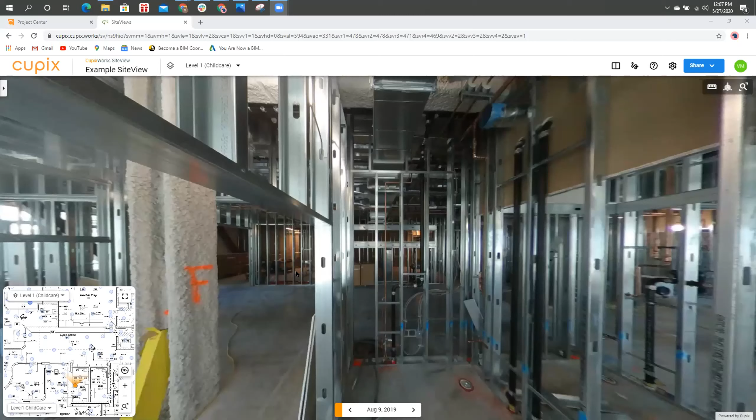What you see here is what we call our site view. It's all the 360 images that you take in the field and upload to our cloud-based software. Since this is a 360 image, as expected, you are going to be able to look around, look up, and zoom into the details above the ceiling. You can zoom into the details in the wall.

The next main thing you're going to notice is how buttery smooth the transition is from one panel to the other. You are just going to glide through them. This is because each of our panels possesses spatial intelligence, and that's what enables the smooth transition. You can easily walk into rooms and walk out of rooms. This is what enables you to do virtual field walks.

You are at this part of the building and you can go all the way to the other side of the building with just one click, in 1 second. It's that fast, and you can see all the visuals with the smooth transition. You might have noticed that in order to move to the other side of the building, I used a small window here, and you can see the floor plan here.

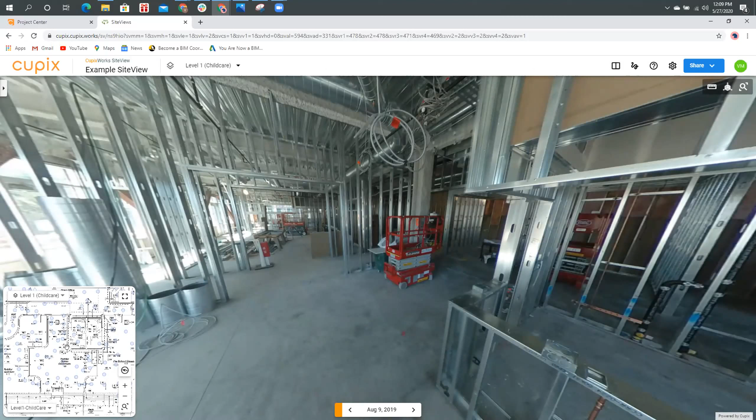This is the floor plan that you upload into Cupix. You can use as many floor plans as you want, and all the captures or images that you have are going to be transported to any of the floor plans you upload. For example, you have the architectural floor plan here right now, but I can switch to a different one by clicking here and going to any other floor plan that you have. I'll get back to that in a second.

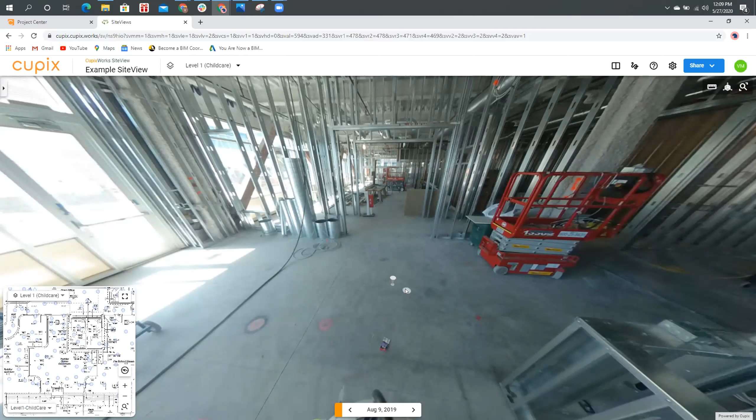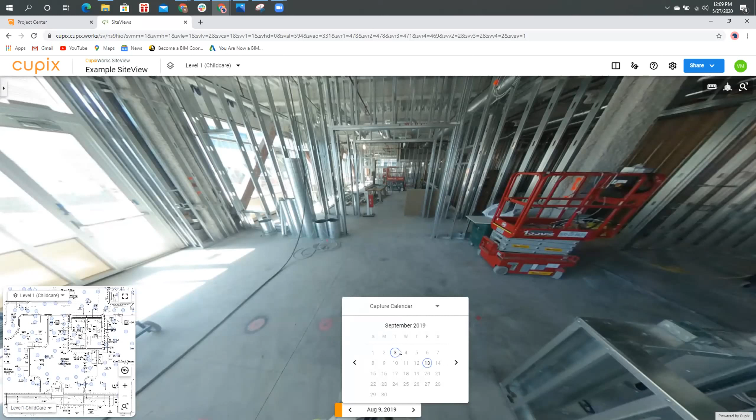The next thing I want to show you is the dates. You are going to do multiple captures over the course of the project, right? You can jump to different dates by clicking here, which brings up a calendar. When you go to different dates, you can see some of them are circled. These are the ones where you have a capture available to view. I can simply click on that, and it's going to take me to the capture that was done there.

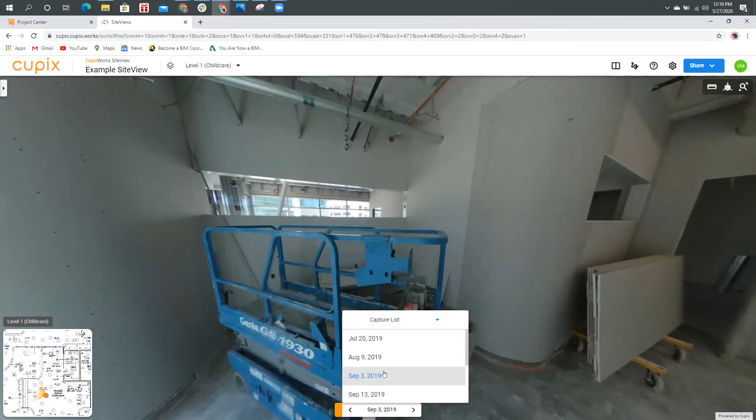As you can notice, the first one we were looking at had framing going up and in-wall work going on, but right now the drywall is being hung. The same way, you can go to different locations like I showed you earlier. You can click here and go to different dates, or you can click here on the capture list, and that's going to show you all the available captures and their dates on this particular floor.

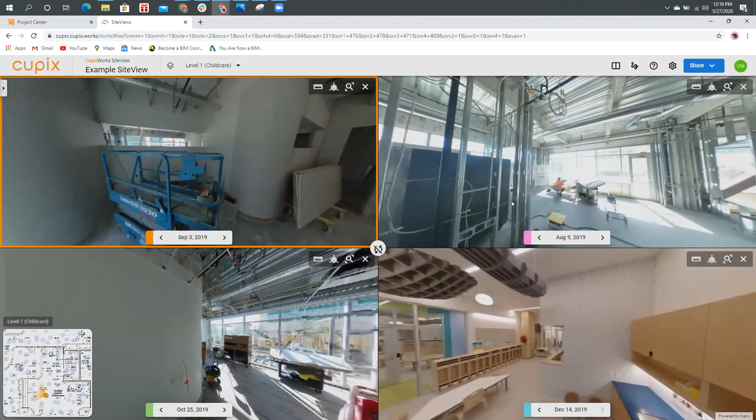Let's go back to the calendar view. The next thing I want to show you is the comparison window. You can access this by going to the side-by-side comparison tab here and clicking on it. As you can see, you can do anywhere from a 2-window comparison up to a 4-window comparison. When I click on the 4-window comparison, you can see all the windows show different dates: September 3rd here, August 9th there, October 25th, and December 14th. So you can see the change that's happening.

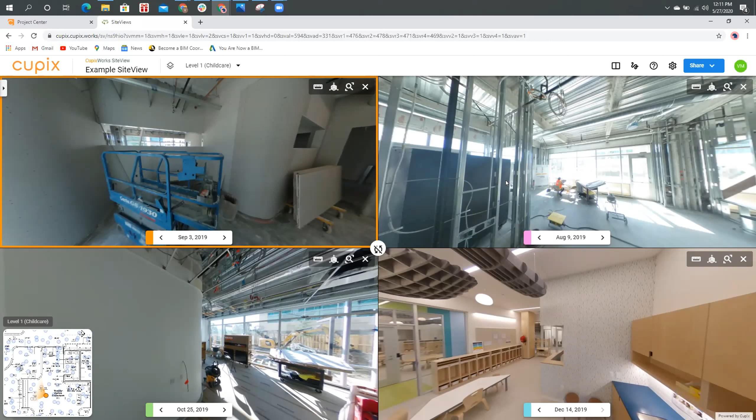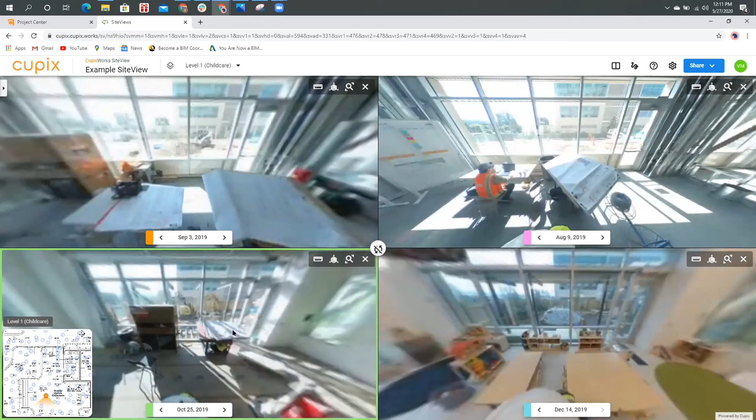You can see the framing going on August 9th, to the drywall being hung here, above ceiling reference going on October 25th, and the finished product on December 14th. So the next thing that you're going to notice is even when I move around and when I look around, you are getting the same exact visuals on all the 4 windows.

So you can go into the map view and you can see that all the 360 photos here were taken at different locations, which comes to one of our differentiating factors: it's not required to take a 360 photo at the exact pinpoint location as you had done before. As long as you have a 360 photo in the vicinity, you are able to get the same visuals.

Because as you can see here, even though they were not taken on the same spot, you are able to see the same images. And that brings us to the highlight of our program, which is how all these 360 images or panos are interconnected with each other. And that's what makes this possible.

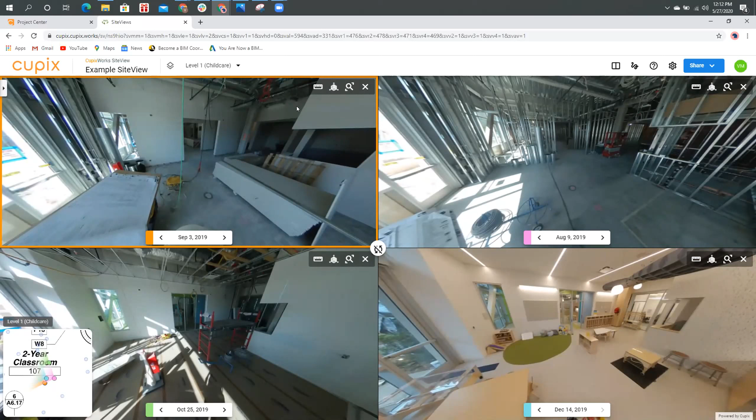So let's jump onto a different floor. If your project is a multi-story building, you can simply go to the level tab here and jump to a different floor. It's that easy. And it's going to take you to the floor that you want to access. So let me close all these comparison windows here, and show you how the comparison view is possible and the spatial intelligence that each of our 360 images holds.

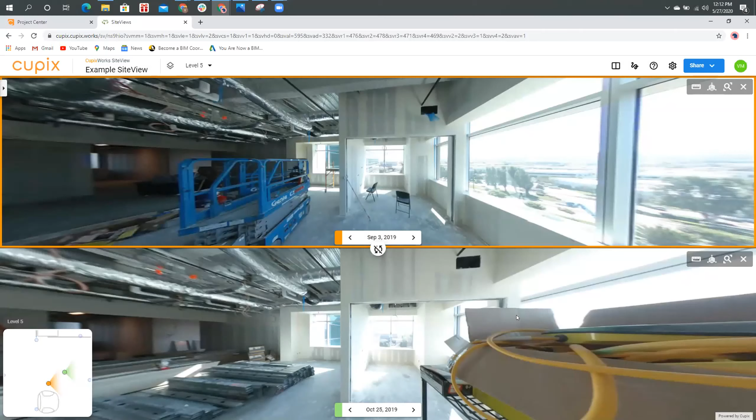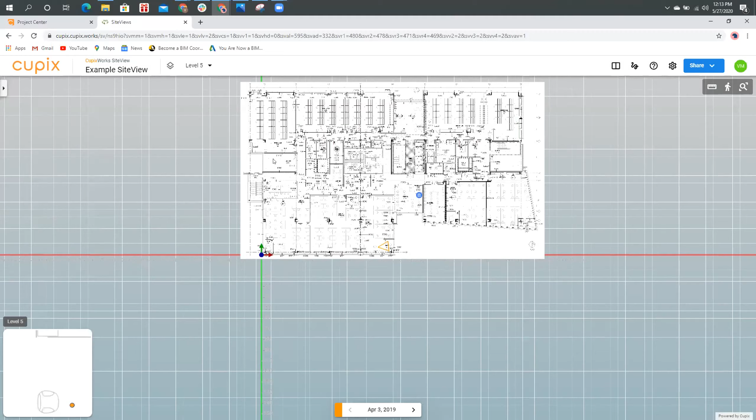So in order to explain that, I'm going to switch from the pano view to the 3D mode. Let's jump to a different date. So this is the floor plan of your job site. I'm going to zoom in here, and I'm going to enable the pano bubbles. So this is going to show all the 360 photos that you took on this floor, right?

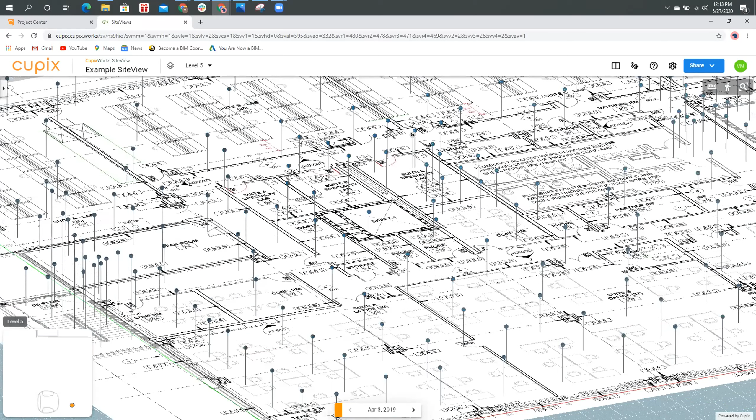So if I move it like this, you can see all the 360 photos that you took are at the same elevation. But when you look here, you can see that they're at a different elevation, and that's because this was taken on a stairwell. So you can see how the person was going down or up the stairwell taking these photos. So all the 360 images that you're taking have spatial intelligence; it shows how they exist in space and how they're tied to each other. And this is what enables us to do the comparison view, the smooth transitions and all those features that I was showing you earlier.

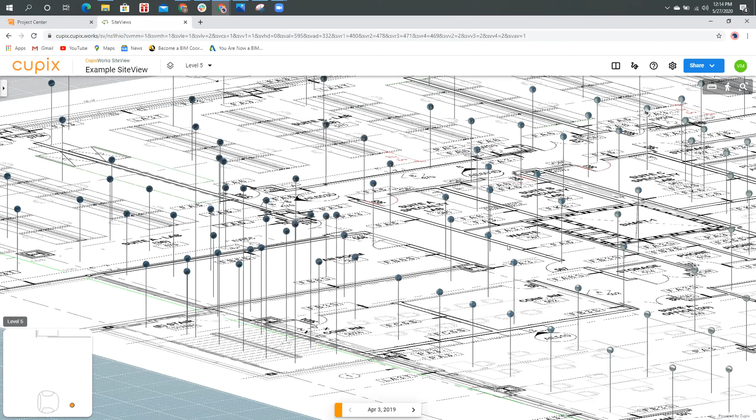Now I'm gonna hand the screen back over to Scott. Thank you.

Thank you, Vinay. Aren't those great? The buttery smooth transitions. I saw the comparison view to a great extent. You really nailed the 3D capability there with some of the examples you showed. So that's going to be a good framework and basis for some later examples that we'll get into, namely field operations, RFIs, quality and safety, work coordination. So that's here to come.

Okay, so we'll continue on. What we've got next is a construction lifecycle framework that I'll present. We'll go through this briefly to show some of the value adds of Cupix, and Shane will be talking a little bit about the pre-construction side. So the construction lifecycle here, courtesy of Autodesk, is the design, pre-construction, field operations, and handover and operations framework. And we're focusing on GCs today, because this is a general contractors webinar, not an architect's webinar, nor an owners or facility management webinar.

So pre-construction, field operations, and handover are the areas that we're focusing on. But since we've got Shane, it would be really valuable for him to interject as much as possible. So he's going to talk a little bit about the pre-construction side, and I'll hand it over to Shane and one of his examples that he's using at Dome.

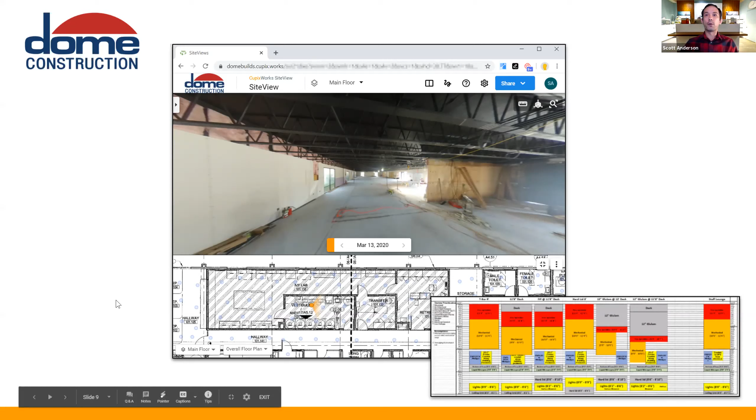Great, thanks Shane for the insight into how Dome is using Cupix in an area of your project management. All right, great.

So today's topic, more in depth, is going to be on the field operations side: quality and safety, progress tracking, work coordination. A way to describe this challenge is to think about all the different roles and the different people that are on the job site or off the job site. The subcontractors in the field, the superintendents and project engineers that are fielding questions or sending them over the fence to the project management and design team. And owners are always involved.

So this communication, this back and forth, this exchange on figuring out what's happening on the job site versus what's not happening is ever more prevalent in the post-COVID era. It's certainly prevalent in the pre-COVID era, and will continue to be an issue for decades to come. So miscommunication, confusion, delayed decision making, these are things that we can help solve with a virtual job site and being able to answer questions and make actionable decisions by looking at a Cupix virtual tour.

So what Cupix provides is this buttery smooth, silky smooth 3D navigation tied together with a 360 view. And by simply taking a weekly capture or on an as-needed basis, you can enable stakeholders to get a lot of value being remotely on the job site. This fella is off the job site. He's working on his computer. He's got Cupix on screen. He's able to look at issues and navigate in 3D and 360 like he's there.

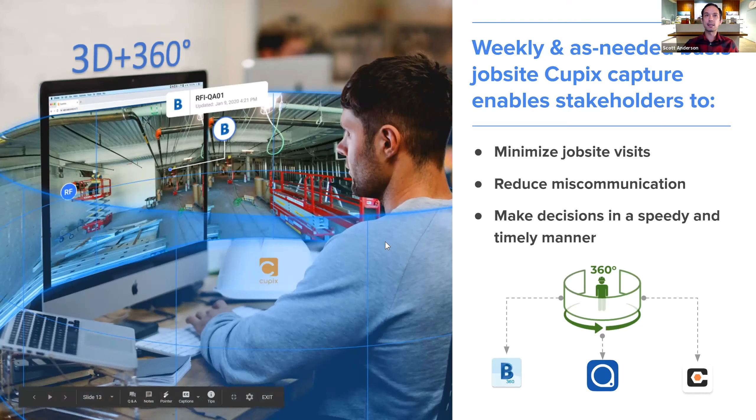But anyways, you grab a camera, you get the Cupix app, and you can start capturing. So you do it yourself with an off-the-shelf 360 camera. So we'll be getting into that a little bit more with how the capture takes place. But I want to hand it back over to Vinay because he's going to be showing some really powerful things with annotations and BIM 360 integration in this portion of the demo.

All right, so thank you, Scott. So this is something that I'm very excited about because I have spent a lot of time writing RFIs, creating field reports, safety issues, and all those kinds of things. So let me share my screen here.

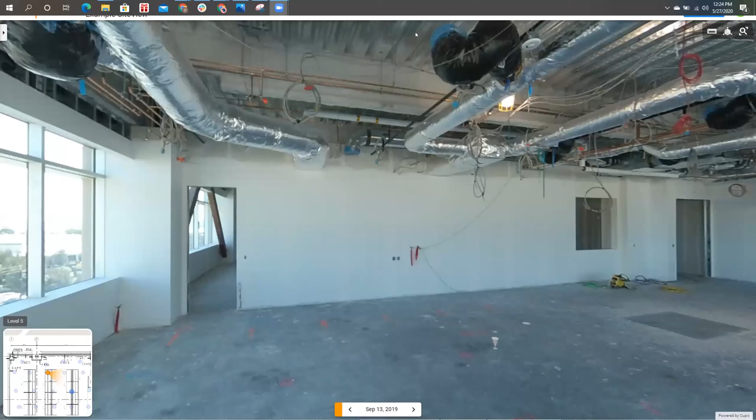So there are a couple of main features that set apart Cupix and that make us a powerhouse and more than just visuals. And the first one is the annotation feature. So you can access the annotation tab by clicking here. And what the annotation tab does is it grants you access to create any type of forms. And this custom form creator can match your RFI forms, issue report forms. It could be for safety incident reporting. So no matter what the workflow is, you're able to create a form that's going to match what you have existing as part of your project.

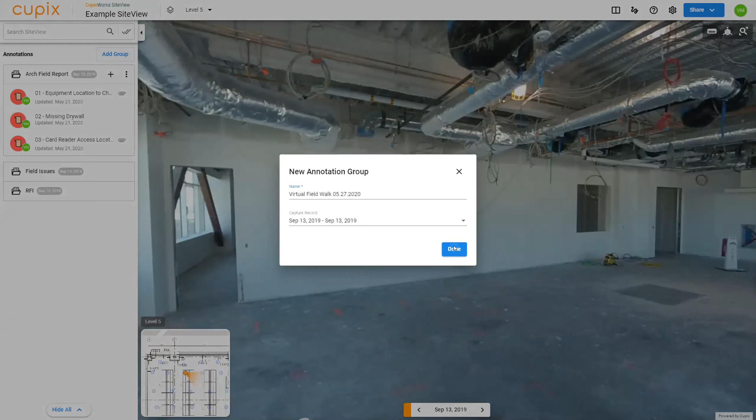So as you can see here, I already have created some examples like the architect field report, the field issues RFI. So the first step would be to create a group, and you can do that by hitting add group, and you can name it. So for example, let me say that the one that I'm creating here is a virtual field walk, and I'm going to date it today. I'm going to hit done. And that's going to create a new group here. So once I get to this group, I can hit this add annotation.

When I go to annotation, I can see all these forms. These are all custom forms that were created. As I said earlier, it could be anything - RFIs, safety incident reporting, field issues, it could be anything. So you have those forms readily accessible to be added onto any of these groups.

As I was mentioning earlier, there are certain features that we have that make Cupix a powerhouse when it comes to AEC technology solutions, and make us something more than just a 3D visual software.

So the second highlight feature is the BIM comparison. You can access the Revit file or the Navisworks file where you did a clash detection for your project by uploading it to Cupix, and access it through the BIM comparison window here.

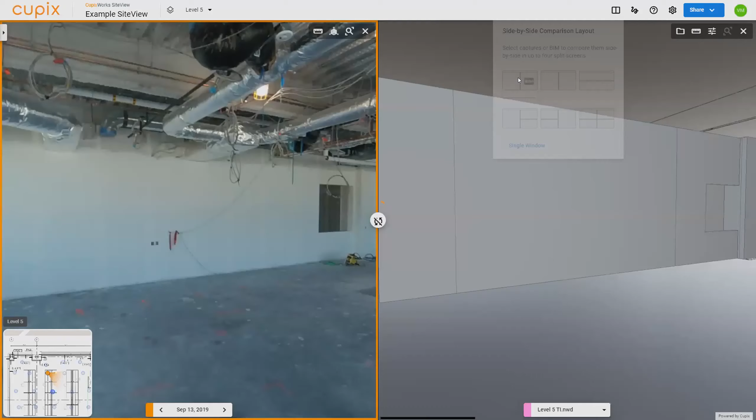As you can see here, like I was showing you earlier, you get the side-by-side comparison with all the same features. You can move around, look up, look down, and whenever you're moving around, you're still getting the same visuals. You can zoom in and zoom out.

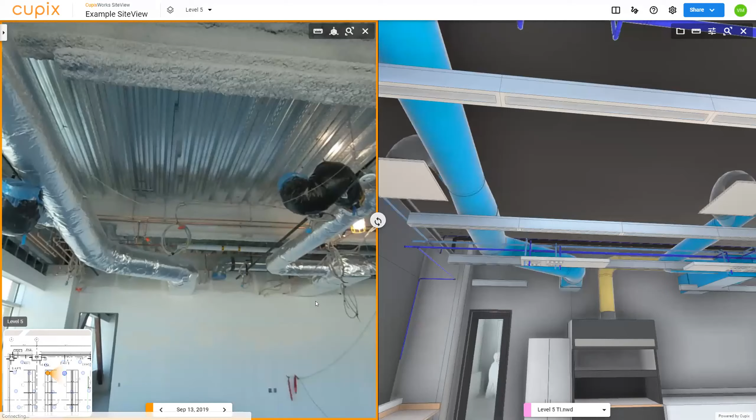If you want, you can unsync it and get a different view of what's going on, but you can sync it back and it's going to be the exact same view. You can also move around and it's still going to be the same visuals.

Now since I showed you that, let's get into some of the workflows. Going to this annotation tab here, I see that the architect had created a field report, which is one of the benefits of having Cupix - you don't necessarily have to be on the site.

The architect was able to do this from his office by virtually walking the job site. As he was virtually walking the job site, he came across a couple of issues, and he had some concerns, so he created a field report right there.

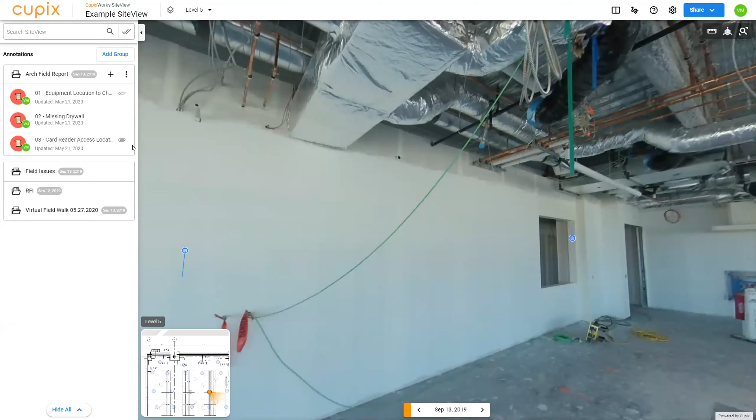Let's take some of this as an example. This item says that the card reader access locations need to be changed, and he's asking us to see the attached sketch - which is also something Cupix enables you to do, like attaching a sketch that also has a markup feature.

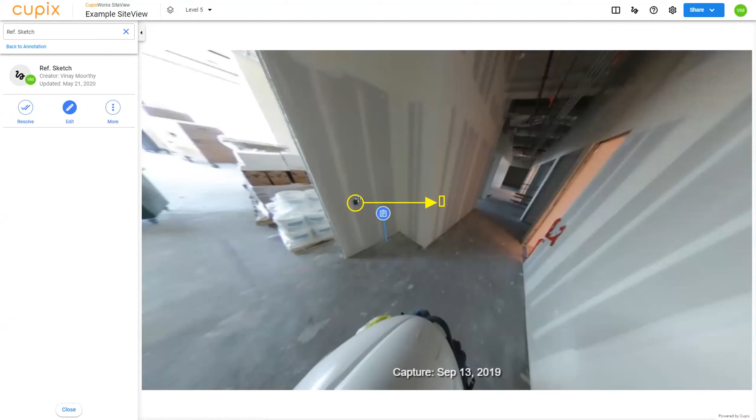As you can see here, it's pretty straightforward. The architect wants to move the card reader from this location, from this wall, over here. So that's pretty straightforward. Let's take a different example.

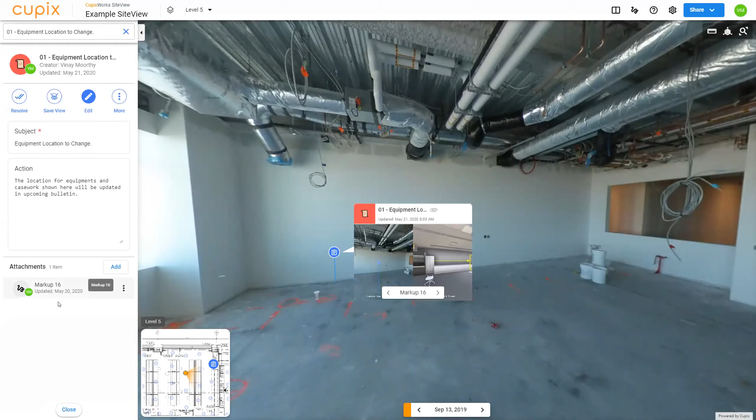This one says that the equipment location is going to change. It says that on the upcoming updated drawings, the equipment on this side of the wall is going to change. So let's take a look at the sketch.

Okay, so this is pretty detailed. He has the BIM comparison open here, and he's saying that this cabinet is going over here, or it could also mean that he's deleting this one and moving it completely over there.

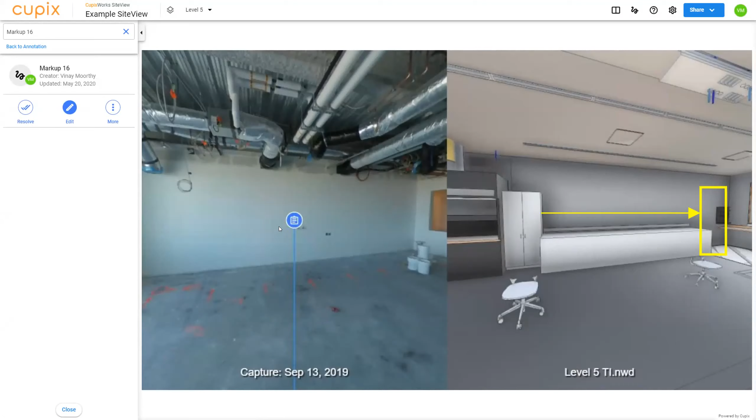Since I'm not entirely sure what's going to happen, and I already have the drywall up, and I want to know the exact detail, because I need to provide the backing for the casework that's going on here, I'm going to officially start this documentation process by creating an RFI.

All I have to do is go to the RFI tab, hit add annotation, go to the RFI template, and I'm going to name this RFI. I'm just going to leave the number here saying RFI, say 20.

Then I'm going to say the subject as the Suite C lab east side equipment change. I'm going to write the question saying that as reported on the field report, the equipment is going to be rearranged, but since it's not clear, can you pick and choose from some of the options that we are going to provide? I'm going to give the due date as a week and a half from now, and this is going to be an architectural type.

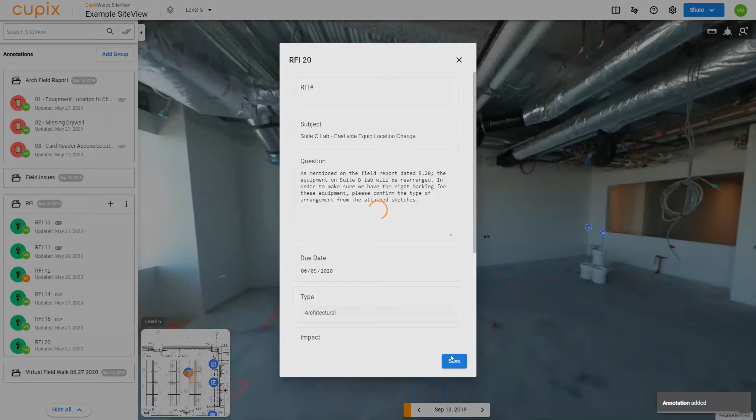Again, this can completely match whatever format you have for your RFI. I'm going to hit save. So this RFI is created here.

Now you see this pin here, you can relocate it to any point that you want. So I'm going to pick a new point, which is somewhere closer there. So I'm going to do that.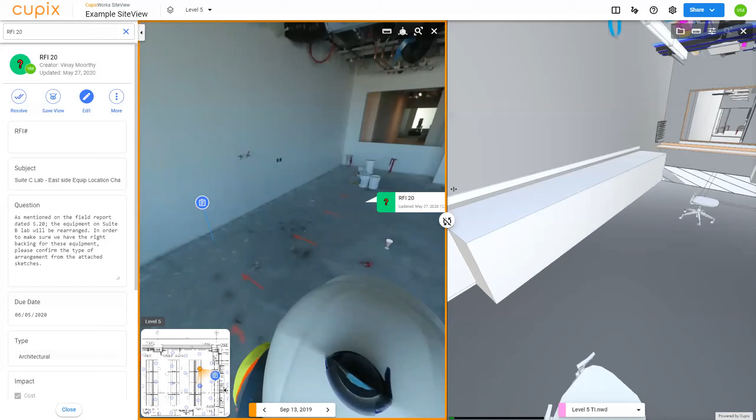I'm going to do the BIM comparison view, because I need to create that multiple sketch. So how this is going to help is I'm going to come over here and take a look at the equipment that's here.

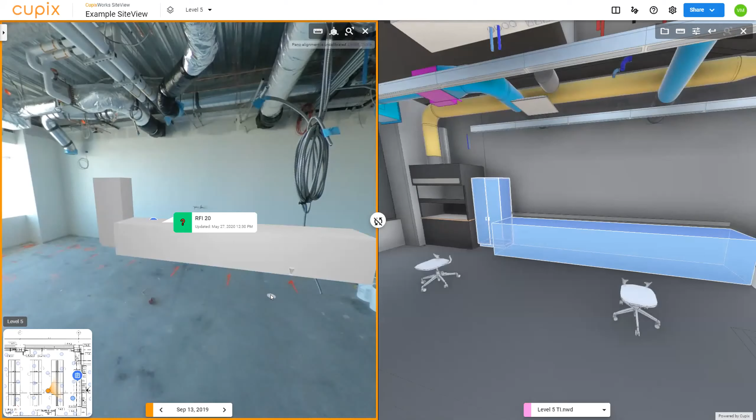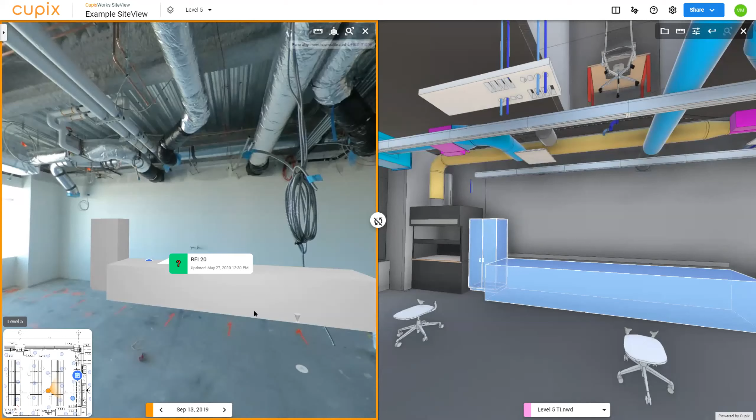So I can basically pick all the equipment that I have a question on, and I'm going to transport it. Now, this is like a game changer. This is super exciting because you're able to transport any objects from your BIM model into the Cupix view. Think about how big of a deal this is for MEP clash detections or making sure a casework fits between the space you have. All this, you don't have to be on site to do. You can just check from your office if you're offsite.

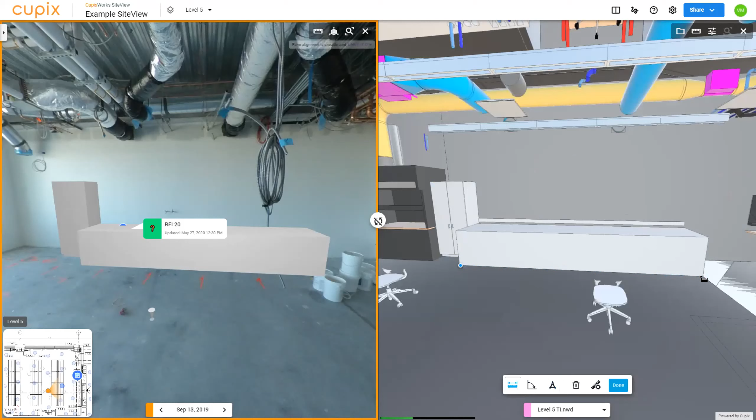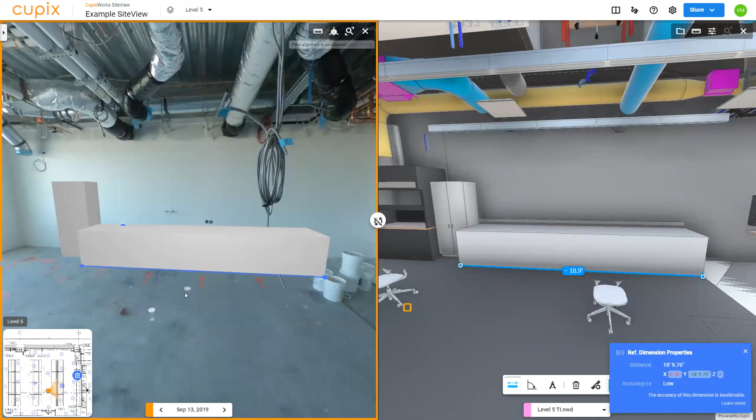This also brings me to the next thing about the measurement accuracy that Cupix has. So if I check the measurement of casework here in the BIM view, it's showing me that it's close to 19 foot here. So I'm going to take the measurement here, and it's as simple as picking 2 points. You can see how close they are. That's another powerful feature you have in Cupix.

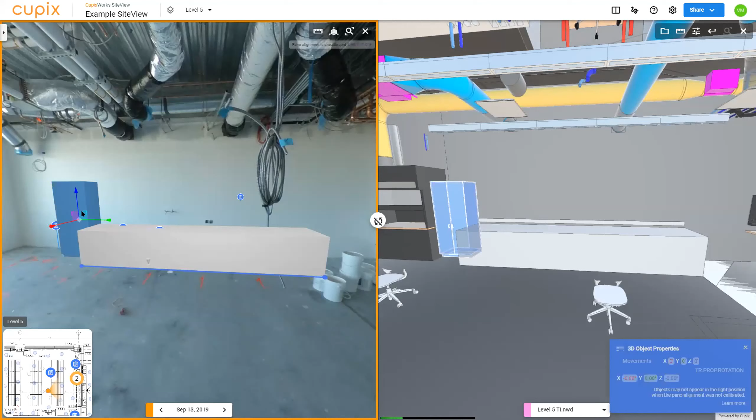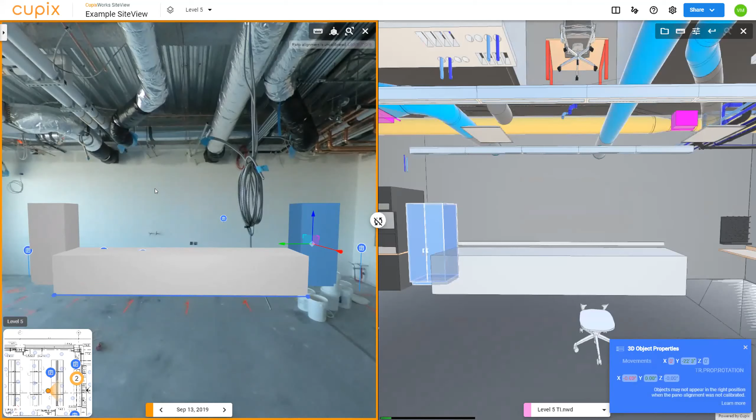So in order to finish the RFI, I'm going to bring this equipment here again, which is going to let me move it around. This is also a game changer. You can actually move around the objects that you just transported from your BIM model, and move them around to see how much space you have, how much clearance you need. So I'm going to take a couple of screenshots of this and add it to my RFI. And what it's going to end up looking like is going to be this.

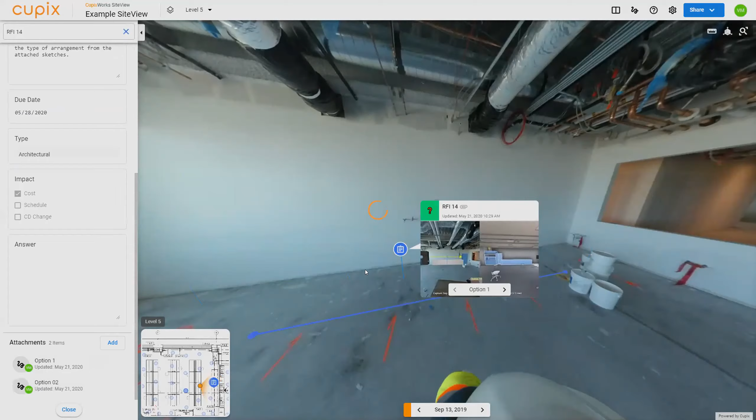So I have a couple of options, which is going to help the architect answer really fast. The first option I'm asking him is whether this cabinet is going to completely move over here, and is this going to get deleted? Or my second option, which is if it's going to get duplicated on the other side. So now, if it's one of these two options, you've cut down the time significantly for the architect to just give you a simple answer. Yes, there is going to be 2 cabinets.

Or with all these powerful features within Cupix, the architect can move around items, see how much clearance he has. If he has to move the casework across the room, he can do that. So you're making the process easier for the architect, which is going to help you get your answer faster. So that's that workflow.

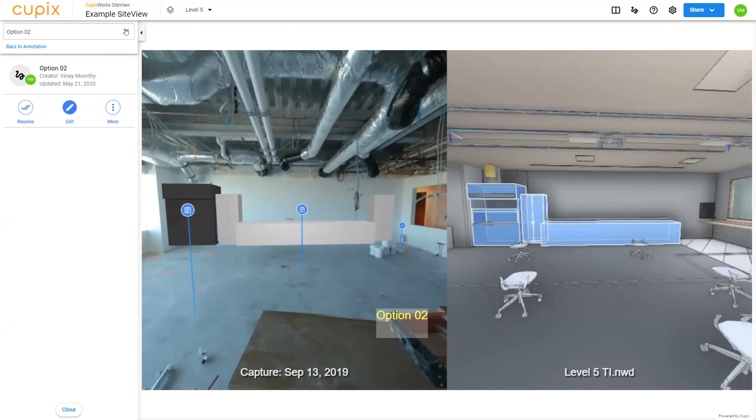So what we looked at is moving on from a field report to the RFI. So the next thing I want to show you is some of the field issues I have created. The whole idea is to enable someone off-site to be virtually be on-site.

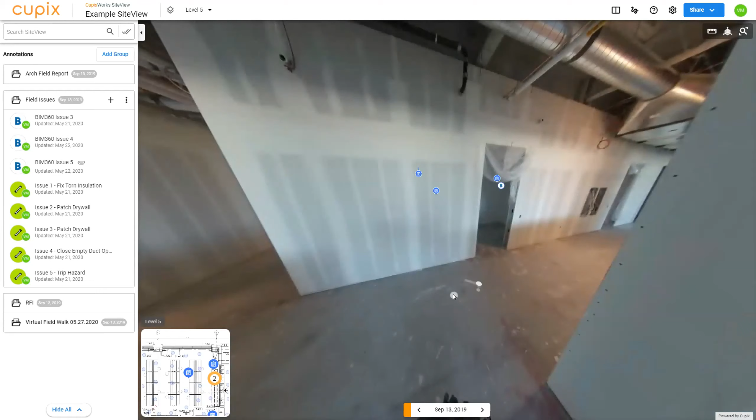So as I was virtually walking the job site, now this could be me as an architect or a project engineer or a project manager. When I'm walking on job site, I could see simple issues like the cables lying around on the floor. I'm going to quickly create a safety item saying this needs to be hung overhead and that this is a trip hazard. It's as simple as that. And you can pin it here. You can take a screenshot, however you want to go about it.

So I told you there are a couple of features that make Cupix a powerhouse. The first one that I showed you was the annotation feature. The second one was the BIM compare, also the BIM transport, and being able to move around the objects in the Cupix visuals. The third thing that makes Cupix a powerhouse is our integration.

So we are integrating with all the major PM softwares, so Procore, BIM 360, and PlanGrid. How that integration works is we match the RFI forms or the issue form that you have, say for example in BIM 360, and are able to create an issue in Cupix and transport it to BIM 360 effortlessly. I'm going to show you a quick example. Let's take this issue.

So this issue here says that the insulation is torn and needs to be fixed. As I told you earlier, you can pin the issue to the location where it's happening, so it doesn't necessarily have to be on the ground. If the issue is something above the ceiling, that's where you're going to pin it. And if a person comes to this room and this issue is selected, even if I move around, it brings my attention right back to the issue, no matter where I'm looking. So that's a nifty feature that we have.

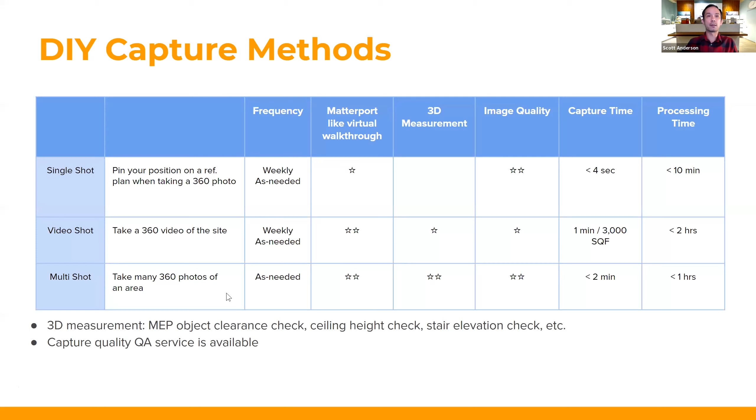Okay, so I'm going to take it from here for a bit and get into how this capture takes place—remove some of the black magic and explain how these captures happen and how you can do it yourself. There are basically 3 methods for do-it-yourself capture: a single shot, which is just holding up a camera and taking a photo; a video shot, where you have a camera running and collecting video as you walk through the job site; and a multi-shot. Each of these has advantages and disadvantages in terms of speed, clarity of imagery, and that silky smooth, buttery smooth walkthrough. We like to use the term Matterport—it's well known in the real estate industry, and we basically match that buttery smooth walkthrough.

So when we're talking about navigation, we're going to be talking about that. So let's go into a couple of the cases, first starting with a single shot method, and just show you how this works. So this fella is just walking around, and he just takes the camera and looks at the app, plugs in where he's at, and takes the shot. So that's as simple as it is.

He would go into a room, plug in where he's at, and take the shot. So a single shot, you pin a position of yourself on the reference plan. This, of course, is using the Cupix mobile app. And if you want to figure out if the walls are painted or if there's a safety issue, that's kind of all you need is that single shot.

It does allow the Matterport virtual style walkthrough, but since you're just taking a photo here and a photo there, having this continuous walkthrough isn't really possible or as efficient with a single shot. You're taking larger jumps between shots. Since a single shot doesn't have these photos that are tied together, like in a video shot frame or a multi-shot frame, you don't get 3D measurements.

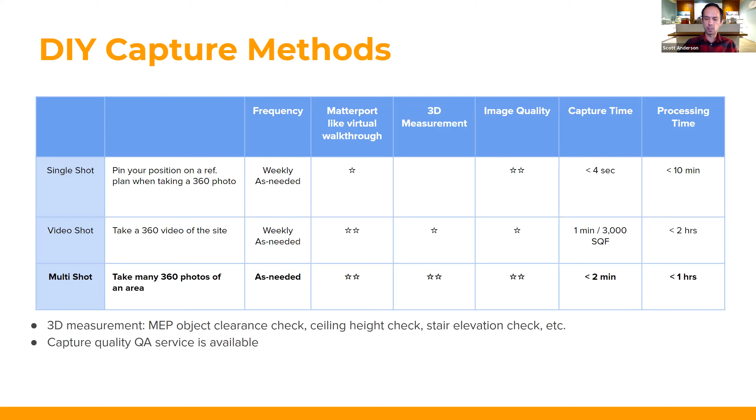Okay, so what this all comes down to, and I think why we're all here, is this is a way to save time and money with technology. We showed some of the workflows that are possible with Cupix. We showed how the capture could take place and how you can generate those virtual tours. And Shane has given a couple of examples of how Dome has been using Cupix on their job sites.